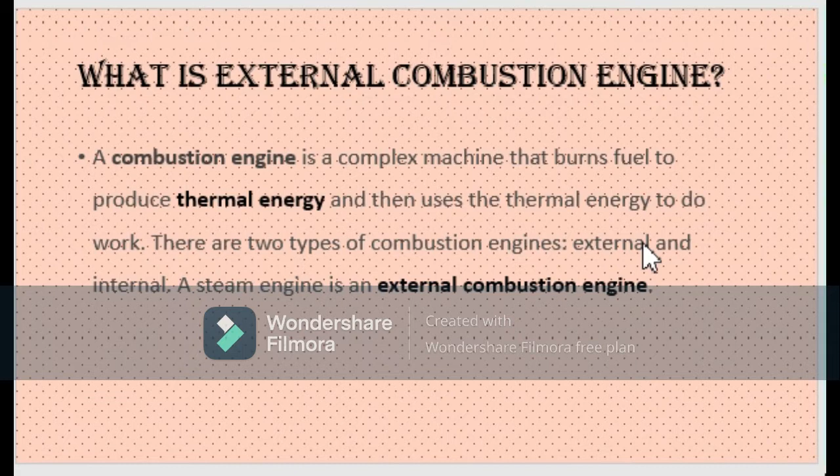A coal-fired power plant works in much the same way, where coal is taken into the plant from the mine and burned in a boiler. Pipes send water into the boiler and the burning coal boils the water, creating steam which turns a turbine and creates electricity.

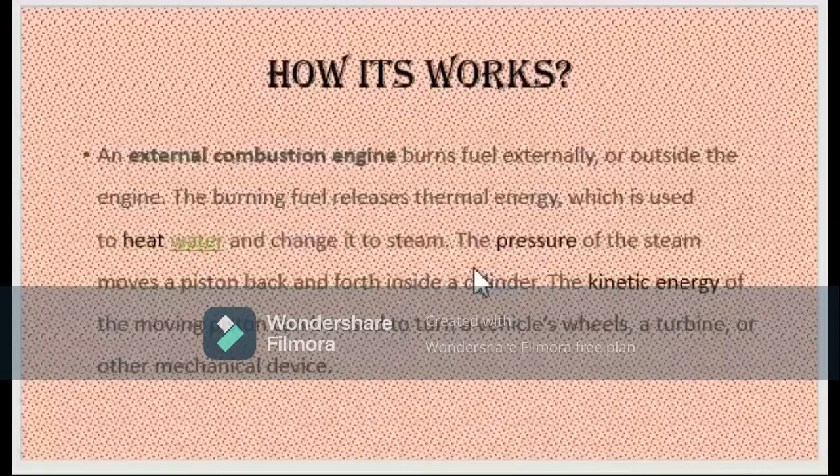How it works: an external combustion engine burns fuel externally, or outside the engine. The burning fuel releases thermal energy, which is used to heat water and change it to steam. The pressure of the steam moves a piston back and forth inside a cylinder. The kinetic energy of the moving piston can be used to turn a vehicle's wheels, a turbine, or other mechanical device.

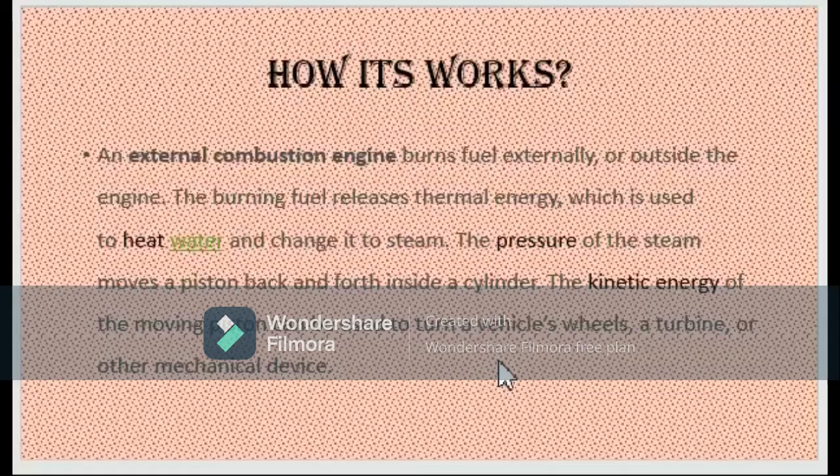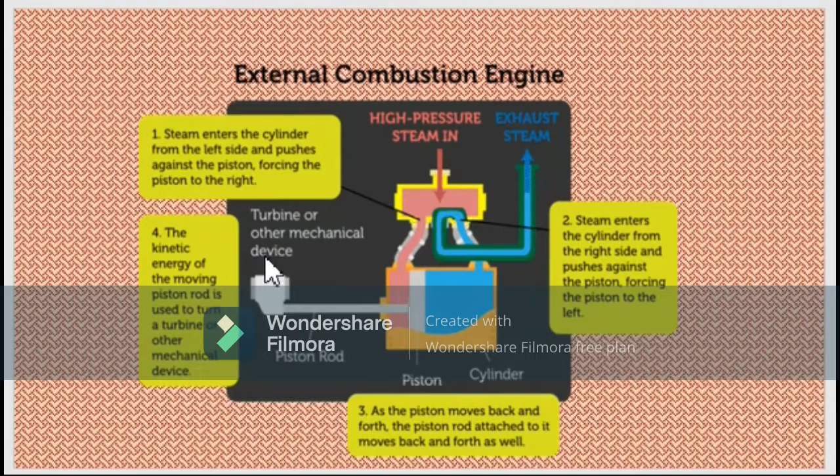Third, as the piston moves back and forth, the piston rod attached to it moves back and forth as well. Lastly, the kinetic energy of the moving piston rod is used to turn the turbine or other mechanical device. This is the piston that will be moving the turbine or other mechanical device.

The first example is the steam engine. A steam engine is a heat engine that performs mechanical work using steam as its working fluid. The steam engine uses the force produced by steam pressure to push the piston back and forth inside the cylinder. This pushing force can be transformed by a connecting rod and flywheel into

rotational force for work. The term steam engine is generally applied only to the reciprocating engine as just described, not to the steam turbine. Steam engines are external combustion engines, where the working fluid is separate from the combustion products.

In the engine, steam is obtained with the help of heat obtained by burning coal. The steam is then sent to an engine where its pressure energy gets converted into work. The engine that was used at that time was of the reciprocating type.

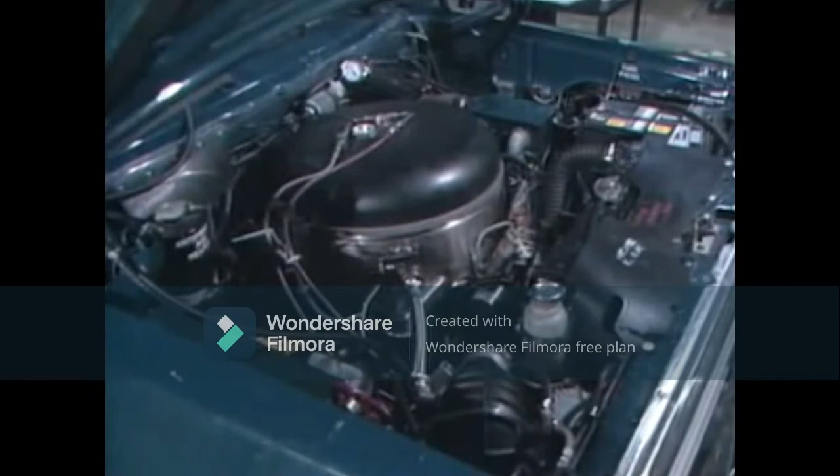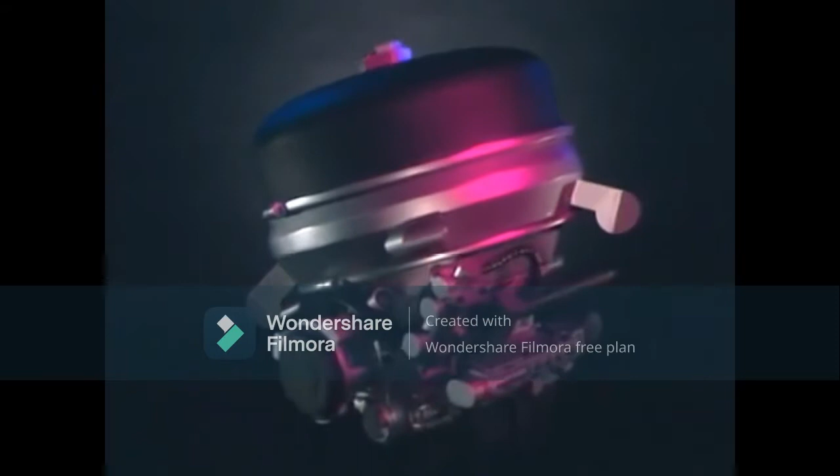The Stirling engine is recognized by the Department of Energy as a promising alternative to the internal combustion engine. An external combustion engine, the Stirling burns any fuel, creating heat for the cylinder. The heat itself powers the engine. Any fuel can be used, liquid, solid, or gas. The Stirling even operates on heat from nuclear and solar energy. Combustion is continuous and complete, quiet and clean.

Ongoing research in aeronautical and automotive engines at the NASA Lewis Research Center in Cleveland, Ohio, indicates the Stirling may be the engine of the future.

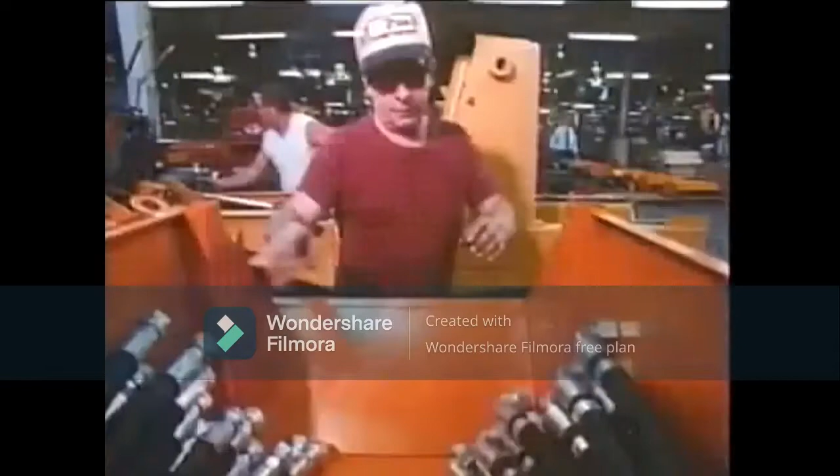Feasibility studies by manufacturers indicate the technology to produce Stirling engines commercially exists today. Value engineering studies have shown the Stirling can be manufactured in low production volumes at a competitive cost. The engine can be built to provide power for both propulsion and stationary applications.

A Stirling engine developed by Mechanical Technology Incorporated for NASA Lewis Research Center and the Department of Energy has been evaluated by a NASA Technology Utilization Program under actual driving conditions. The Stirling engine was installed in an Air Force van. The van's original 150 horsepower diesel engine was replaced by a 75 horsepower Stirling and assigned actual duty service at Langley Air Force Base in Virginia.

Air Force operators drove the van throughout the test, serving 10 to 15 aircraft on a flight line, driving from base to aircraft, moving about the field in and around aircraft, stop and go, hauling personnel and equipment. Performance was monitored by special equipment mounted in the van. Engine speed, vehicle speed, and miles accumulated were recorded daily.

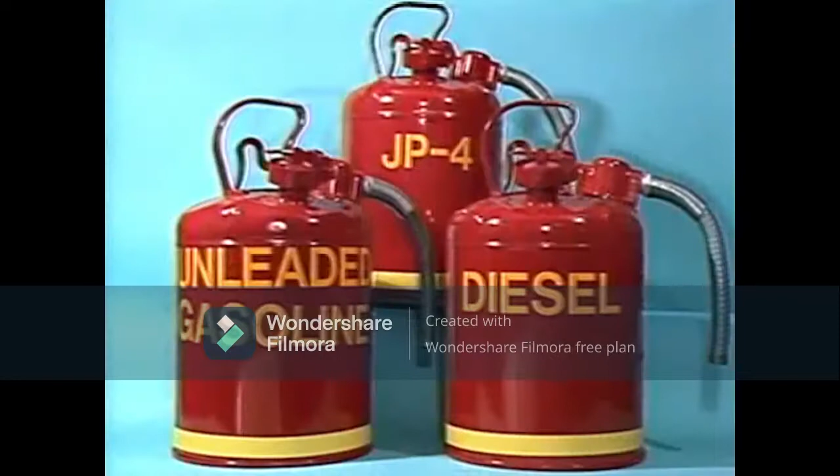During this Air Force mission, 3 different fuels were used: unleaded gasoline, JP4 aircraft fuel, and diesel fuel. The van functioned normally during the 1-year evaluation period on whatever fuel was available. The Stirling's high torque capability at low speeds enabled towing of all heavy support equipment. After 1,400 hours and 7,000 miles, results showed improved fuel economy.

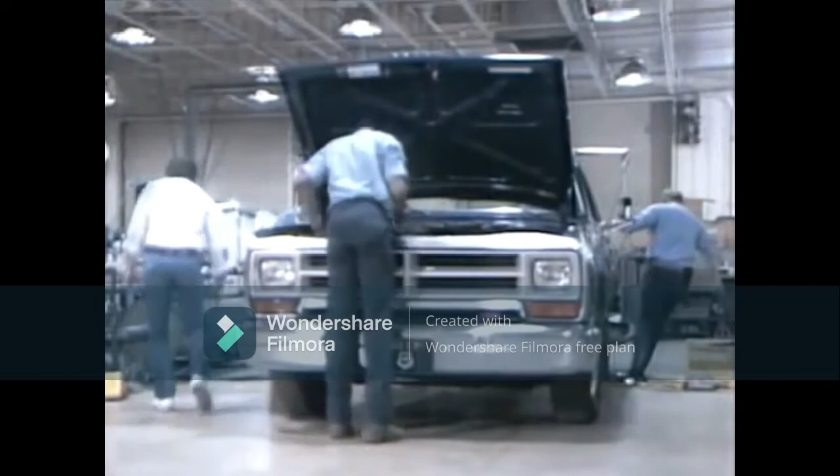A second vehicle, a standard Air Force truck, was also evaluated. The truck's original 95 horsepower internal combustion engine was replaced by a 75 horsepower Stirling engine. Tests were conducted over a 1-year period for 1,000 hours and 19,000 miles of open highway and city streets, on rough and rural roads, and in normal traffic in a variety of environments.

In moderate climate, the Norfolk, Virginia area, an expediter mission at Langley Air Force Base. Hot, moist sea air environment, a general transportation assignment at Eglin Air Force Base, Florida. Hot, dry environment, base taxi service at Randolph Air Force Base, Texas. In the north, a base supply mission at Offutt Air Force Base, Nebraska.

In addition, the truck was driven from Texas to Washington, D.C., a distance of 1,600 miles. The entire trip averaged over 50 miles per hour. The Stirling consistently delivered more miles per gallon.

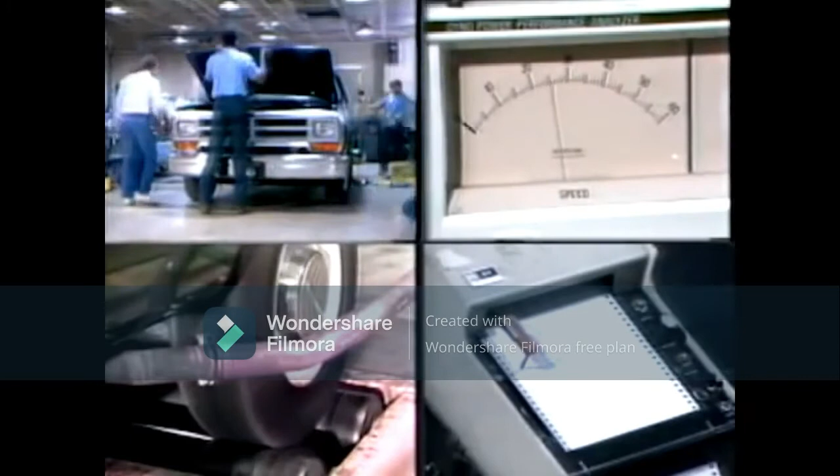Current engines are a major contributor to the severe atmospheric pollution in our cities today. Exhaust emissions were evaluated, and the Stirling engine met federal emission standards. No catalytic converter or particulate trap was needed. The exhaust is cool and clean. The Stirling engine can help reduce these pollutants to meet even the most stringent California standards.

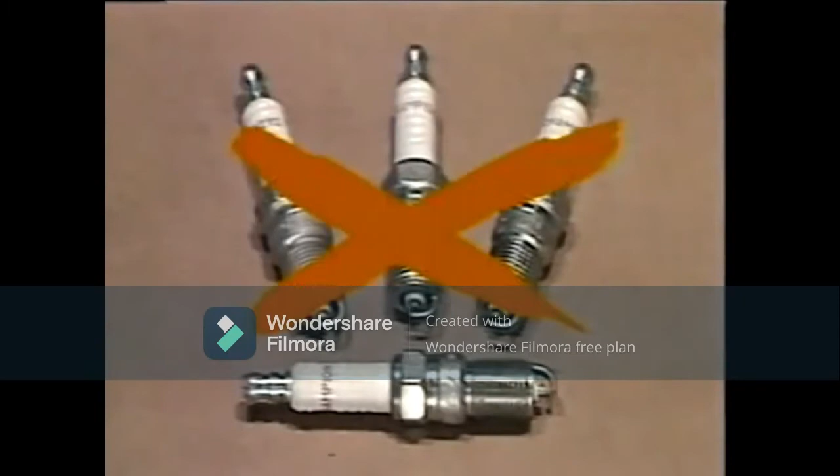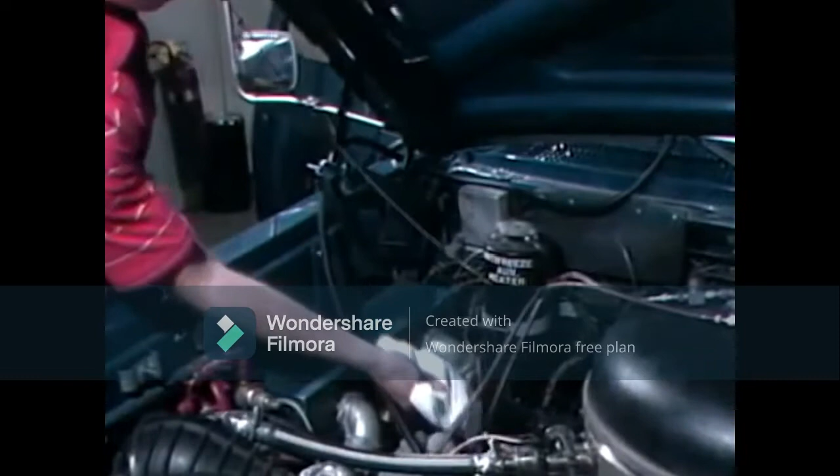Also, several maintenance requirements were eliminated, with only 1 spark plug to start combustion, no carburetor, no catalytic converter, and no muffler. Because the engine oil is not exposed to combustion products, it stayed clean and uncontaminated throughout the test, eliminating the oil changes. The Stirling engine offers increased fuel economy, multi-fuel flexibility, and reduced life cycle costs.

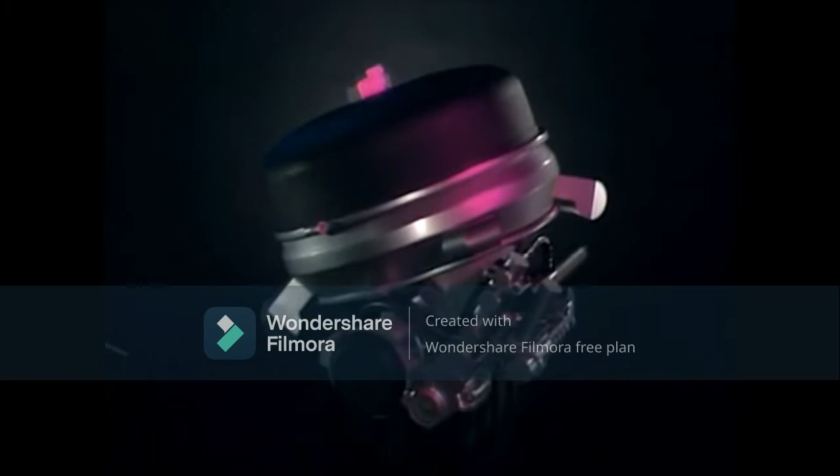Its economy and efficiency of operation are being demonstrated. The Stirling engine appears ready for market. NASA's Technology Utilization Division continues to work with U.S. industry, providing data to manufacturers and end users, answering the questions on Stirling technology. And the technology is available now to build the power plant of the future today.

Power for America, on the land and in space. The Stirling engine, an alternative power plant of the future.

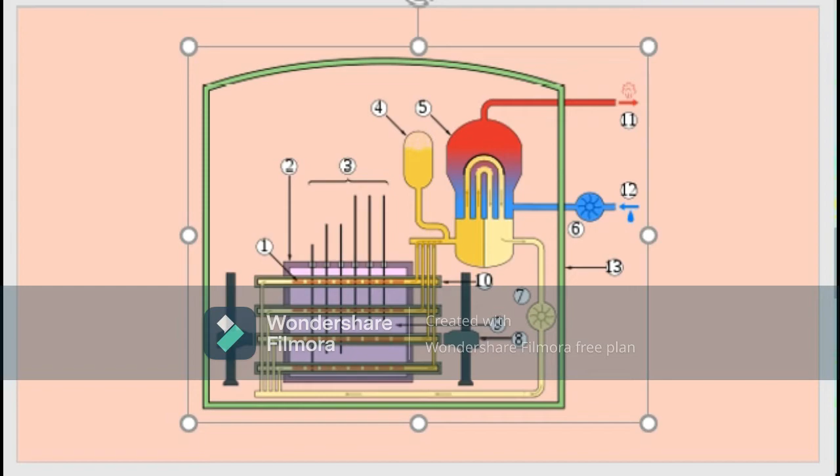There are many advantages of external combustion engines. Almost any kind of fuel that is available can be used. Since power is not generated due to detonations of fuel, hence very little noise is generated. The third advantage is engine emissions are also very low. And the last one is it's very economical for huge power generation.

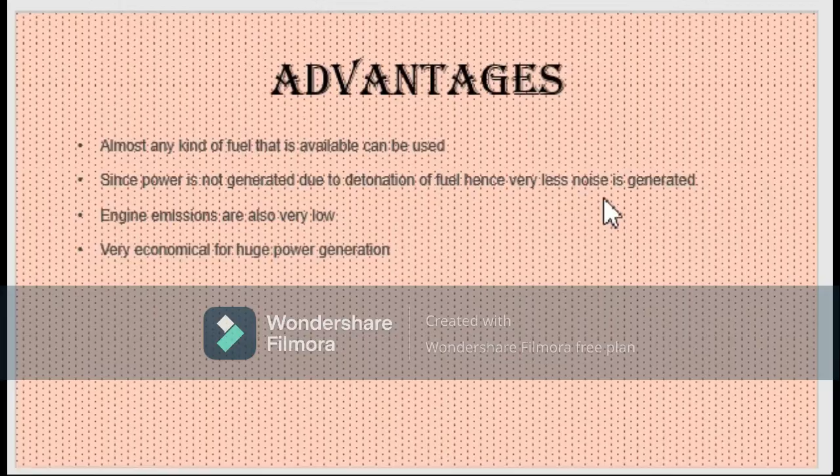Next are the disadvantages of external combustion engines. The first one is not suitable for low load requirements. Second is leakage of working fluid. The third is lubricant consumption. The fourth is the size of the engine is relatively big. And the last one is the overall working temperature is high, so great care and special building materials are required.

There are many types and applications of external combustion engines. The first is the steam engine, used in locomotives and marine applications. The second is the Stirling engine, used in experimental space vehicles. The third is the steam turbine, used for power and large marine applications. And the last one is the closed cycle gas turbine, used for power and marine applications.

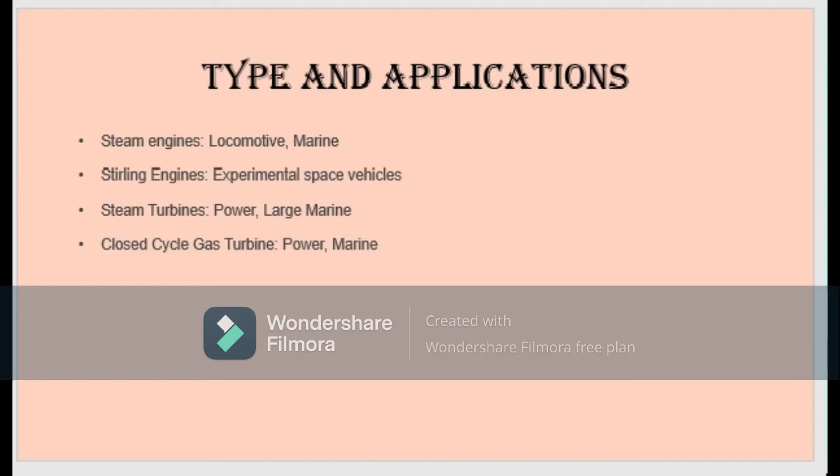In this video, I explain to you the difference between the IC engine, meaning internal combustion engine, and the EC engine, meaning external combustion engine, in detail. Here in this figure you see this is the internal combustion engine and this is the external. So why it's called internal and external combustion engine, that I also discuss in this video.

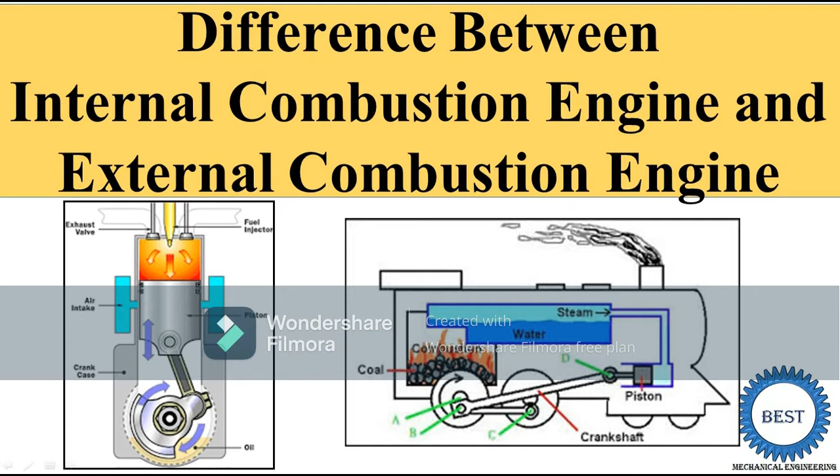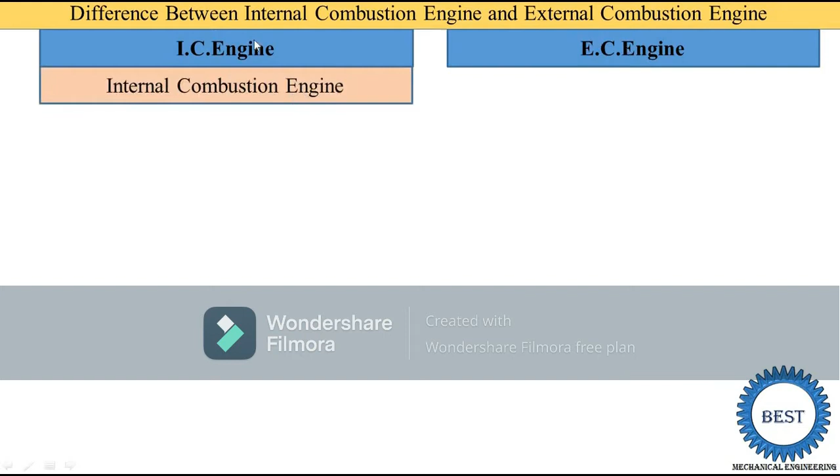On the left side I've written the points of the IC engine, meaning internal combustion engine, and on the right side is the EC engine, meaning external combustion engine. From its name we can understand that if combustion takes place inside the cylinder, then it is known as the IC engine. So combustion of the fuel takes place inside the cylinder. As the name suggests, internal means inside and external means outside the cylinder, so it depends on the process of combustion. If combustion takes place inside the cylinder, it is the IC engine, and if combustion of the fuel takes place outside the cylinder, it is known as the external combustion engine, or in short the EC engine.

Here I show you the figure of the IC engine, the internal combustion engine. In an internal combustion engine we use fuel like petrol, diesel or gas, and the petrol is supplied with air. Here combustion of the fuel takes place, and due to this combustion high pressure is created. These high pressure gases apply force on the piston, and the piston rotates the shaft, and the shaft produces some work done. So mechanical power is produced using the IC engine. The hot gases subsequently expand to develop mechanical power, meaning the combustion gases expand, and then we produce mechanical power on the shaft. It is generally used in our bikes and cars and different transportation devices because its size is compact compared to external engines.

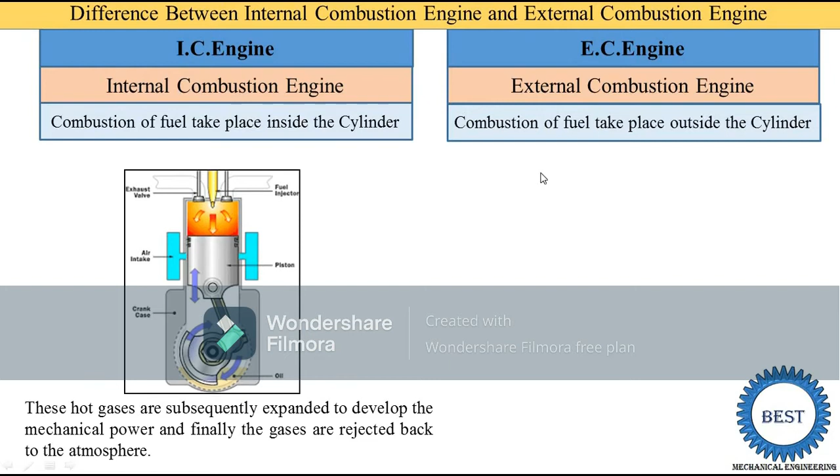So external engines are right now not used in any automobile vehicles. In earlier cases, the external engine was used in locomotive trains. So 40 to 50 years back, the steam engine was used in railways to run the train. But right now trains run using electric engines, that is using electric power.

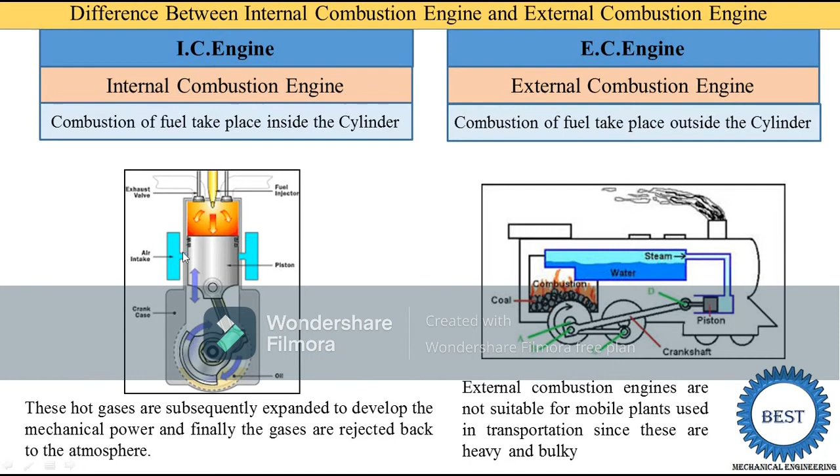So in a train, here you see in this figure, the combustion takes place outside the cylinder. So where is the cylinder? This is the cylinder and piston arrangement. The heat energy of the combustion gas is supplied to the water, and the water is converted into steam, and steam is supplied as fuel inside the cylinder. So combustion takes place outside the cylinder, here in the furnace, and it is known as the external engine. External combustion engines are not suitable for mobile plants, meaning for transportation purposes, because they are heavy and bulky in size, whereas IC engines are smaller in size. That's why IC engines are used in our transportation vehicles and different automobile vehicles.

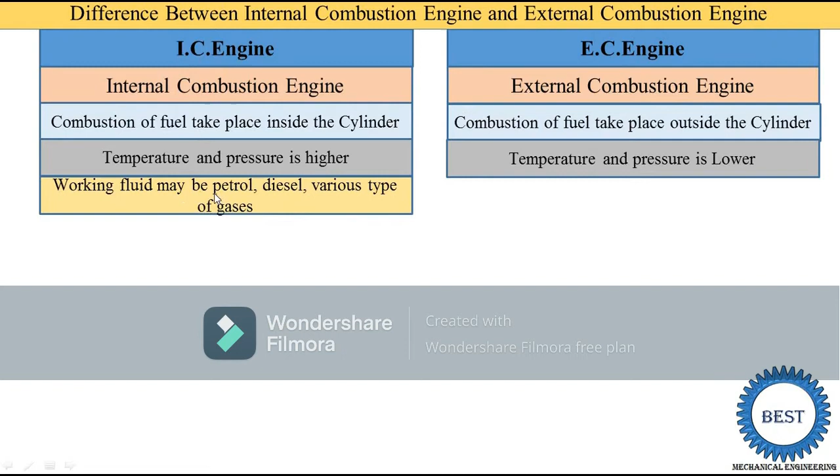In an internal combustion engine, the working fluid may be petrol, diesel or various types of gases, which we already use in our bike and car.

In an external combustion engine, the working fluid is steam. The steam is produced by burning coal, wood or other waste. This heat energy is supplied to water, converting it into steam, which is then supplied inside the cylinder.

External combustion engines are now used in gas power plants and steam power plants.

Capital cost is relatively low for an internal combustion engine, and for an external combustion engine, capital cost is relatively high.

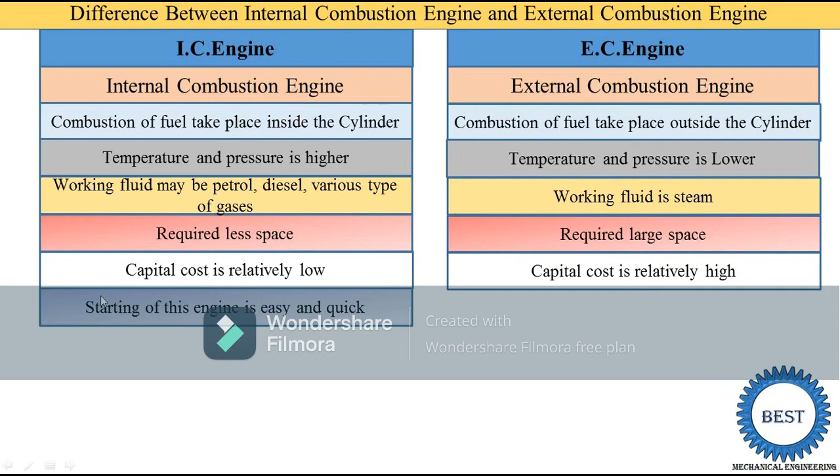In an IC engine, starting is easy and quick. You can start your bike or car by just turning the key or giving it the accelerator, so it starts easily without requiring much time.

But in an external combustion engine, it requires more time because the steam is generated by burning coal or wood, which takes much time. So starting the engine requires time.

Thermal efficiency is high because the combustion takes place inside the engine, so there is less loss of thermal energy compared to external engines.

In an external engine, thermal efficiency is low because the combustion takes place in a different place. The heat energy is then transferred inside the cylinder, so losses increase due to this transportation, making thermal efficiency lower for external combustion engines.

Power developed per unit weight is high for internal combustion engines compared to external combustion engines. In external combustion engines, power developed per unit weight is low.

The last point is fuel cost. In internal combustion engines, the fuel used is petrol, diesel and gases, which are costlier. Fuel cost is relatively low in external combustion engines.

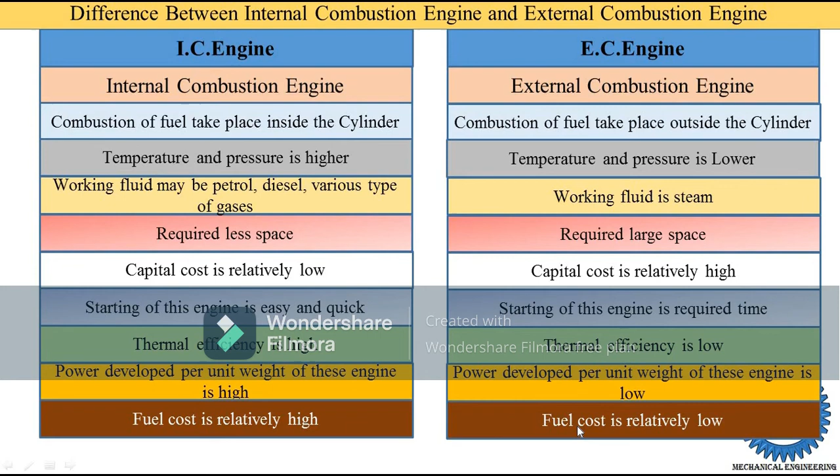In external combustion engines, the fuel used is coal, wood or some waste energy. The cost of coal and wood is comparatively lower than petrol and diesel used in internal combustion engines.